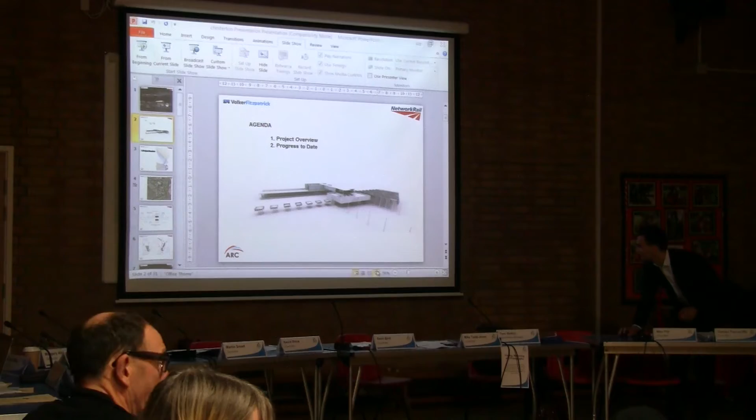What we're going to do today is the three of us talk. Joe is looking after the project from Network Rail's point of view on the site, so he's going to give you the overview as to where we are on the scheme. And I know there's probably a live debate at the moment around the planning application that's recently gone in for moving the car park.

Then I'm going to take you through - both of us going to take you through - some of the work that's been going on over the last few weekends, because as you probably know, the railway between Cambridge and Ely has been closed over the last couple of weekends to allow Network Rail to make this work all the way along the line, and that's allowed us to get cars and equipment onto the railway and do some of the work we need to do in advance of the scheme.

And then Rob is here to talk about where we are with the station opening date and other things like that. And Bodie, who I've not forgotten about, is here again today, because a couple of meetings ago he outlined the proposals for replacing the existing level crossing equipment at Fen Road level crossing, and he's going to give us all an update on where we are with that.

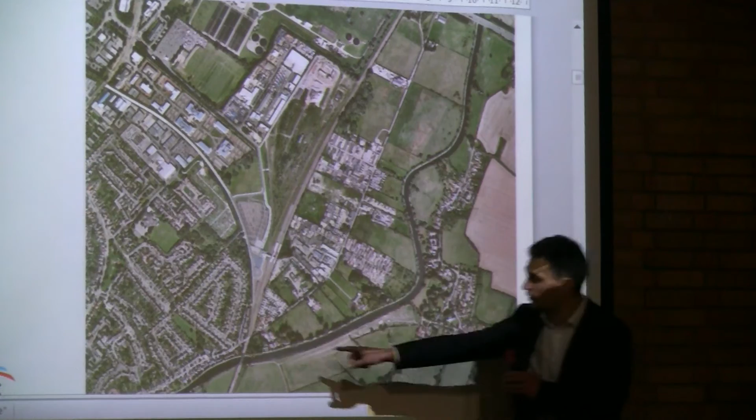The station itself essentially tags onto the existing infrastructure, the up and down main, with an island platform and a single platform. The single platform serves the up, so if you were travelling to London, you would access it on the single platform. Then there's an island platform, essentially a bay platform, which enables trains to terminate at the station, and the down to enable trains to travel to Ely and pick up at Ely.

We have tried very hard to reduce the amount of technical speak in this presentation, but I have to apologise - my colleague has informed you that in this particular instance, up is down and down is up. So if you're going up, you're going to London in the south, and if you're going down, you're going up to Ely. I hope that's very clear to you. Apologies for any technical talk, which Network Rail will notoriously be poor for. Chris can correct me as I go along, and I'll apologise in advance because it's ingrained in me, unfortunately.

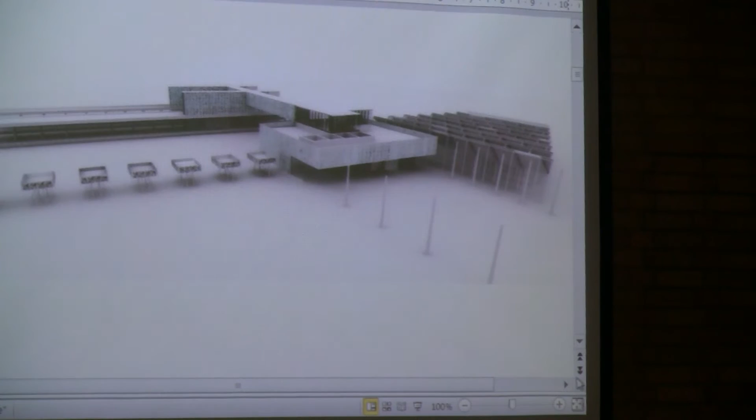Okay, sorry, we're not doing very well tonight, are we? There we go, two more, right?

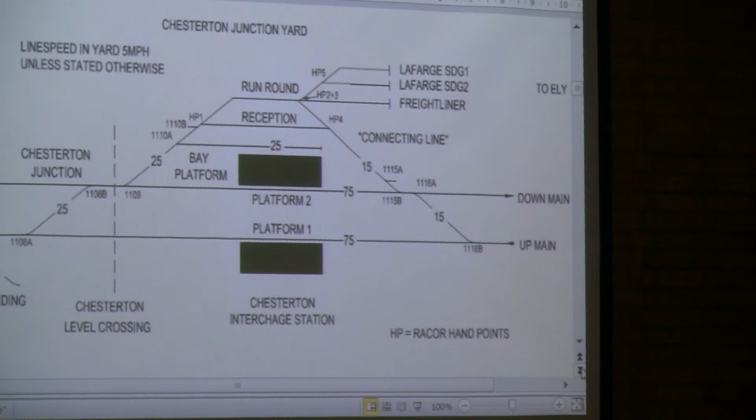One more. Okay, so here's a schematic. It's obviously not what it's going to look like at the ground, but it gives you an appreciation of the track layout as shown on site. As mentioned earlier, we've got the up and down main, which is the main line currently in existence, and shown just above that is the Chesterton Junction Yard.

Now this is the proposed layout, or the layout we've recently installed. This new layout was a scheme derived by Network Rail, because the current operation within the Chesterton Junction Yard meant that when trains were entering to manoeuvre into the correct siding to discharge materials that came in via train, they had to foul the main line at this point here.

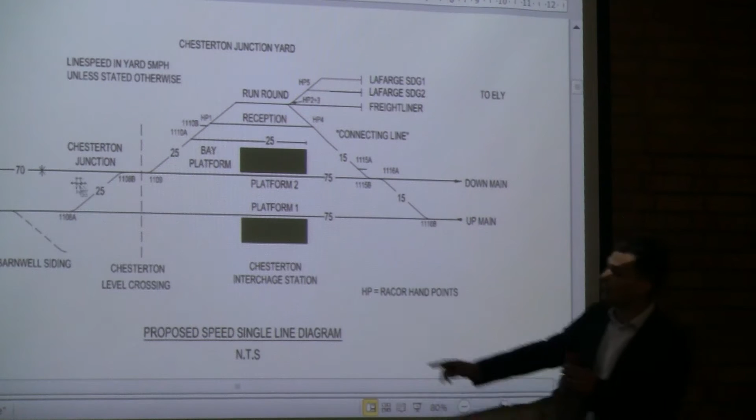Essentially, when trains were historically manoeuvring within the Chesterton Junction Yard, they'd foul that point, which would lower the level crossing, and there'd be a period of downtime whereby vehicles could have crossed the level crossing whilst that train undertook the manoeuvre to get to the location.

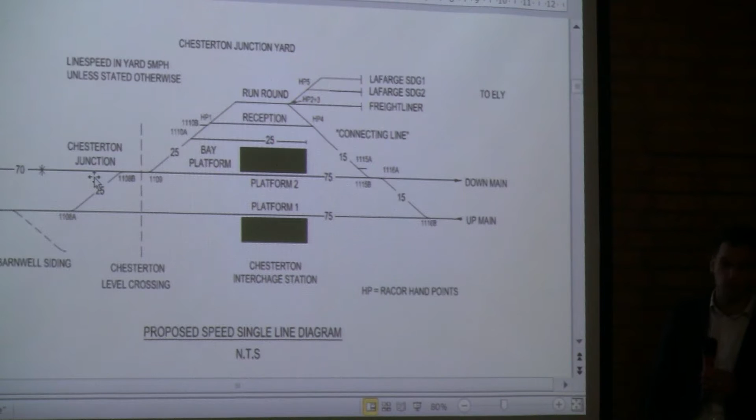As a consequence, Network Rail saw that as a constraint on the network and a hindrance to local residents. We've implemented this scheme that enables trains to come straight into the Chesterton Junction Yard and manoeuvre within the junction yard without fouling the main line. Essentially, that means there'll be less downtime on the barrier crossing when trains are manoeuvring within the yard.

These works have actually successfully been installed and have been in operation since the beginning of December. I'll show you some progress pictures of those works that have been carried out in conjunction with the station project as we move through the slides.

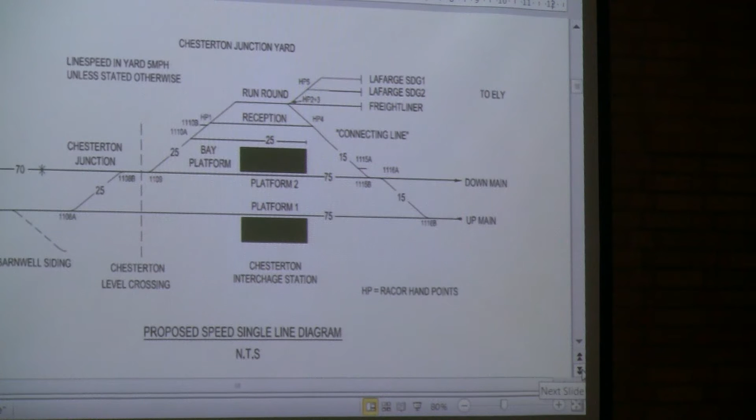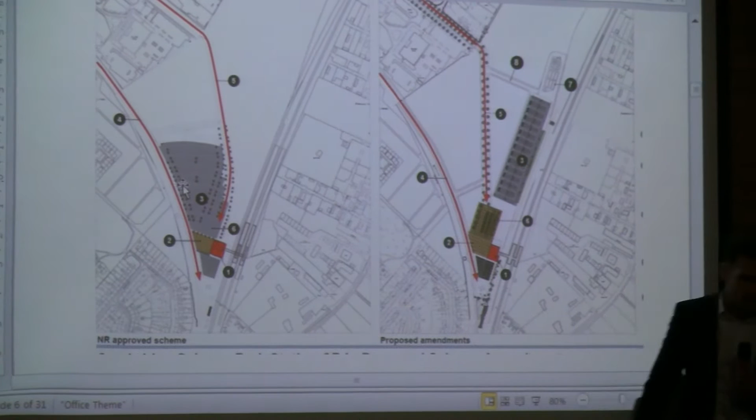Okay, so I previously showed you what we refer to as the NR application. It was the first application submitted by Cambridgeshire County Council, and Network Rail subsequently submitted a revised application so that we could implement the works.

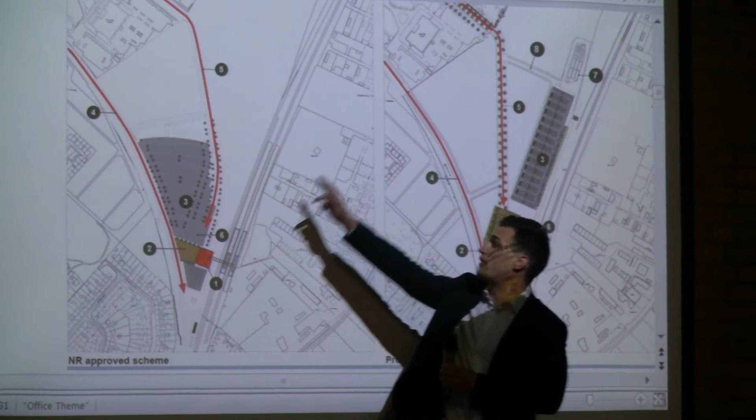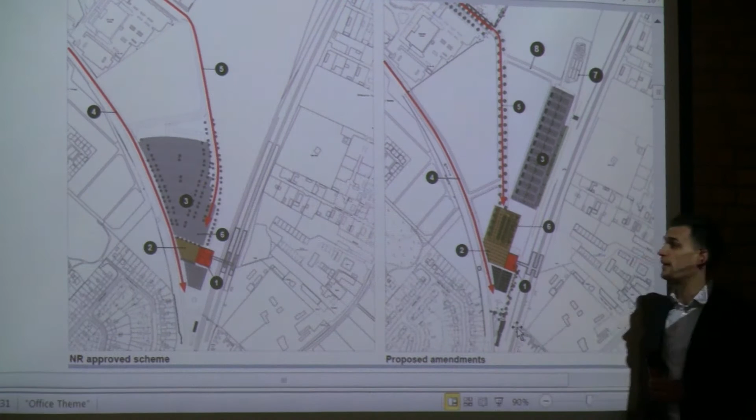So when Cambridgeshire were developing the design, they had to ensure all the station building was to the left of that red line. Now that's been diverted, it's essentially opened up the entire site. As a consequence, Network Rail had a look at that and put together a more efficient design that enables future-proofing, and takes into account the council's future master planning of the wider area.

Obviously, being a rectangular car park, it lends itself to being decked in the future should the number of car parking spaces exceed the supply currently provided. So if the 450 is insufficient, there's now a more reasonable means of extending that car park and providing further car parking spaces.

There was also an aspiration to provide a wider, more direct boulevard to the station. So essentially, when you come off of Cowley Road, there was a clean line of sight straight to the station building, which enabled a wider master plan around the wider area within the Chesterton Junction Yard itself.

The station building, platforms, cycle canopies and the guided busway leading in haven't changed. It's purely the boulevard leading into the station and the car park itself that's changed. So the visuals you would have seen of the station remain one and the same.

And that's the application that's currently under review with the council. This application was submitted to the council just before Christmas for initial review, and hopefully it will go to the Joint Development Control Committee in March. That's our target date.

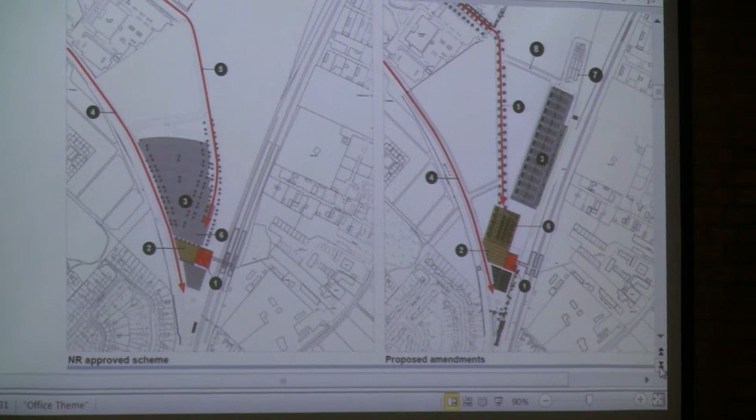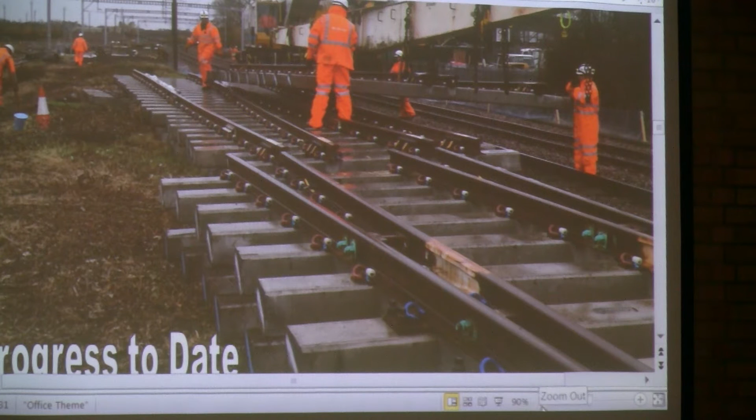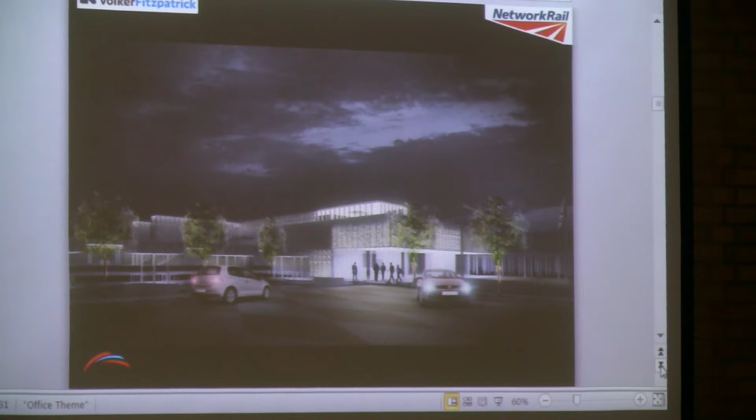So we've got some progress pictures. Those of you local to the site will be aware we've been in operation now for quite some time. A lot of work relates to the freight sidings job that's now operational, and other works relate to the actual station building itself and getting it prepared.

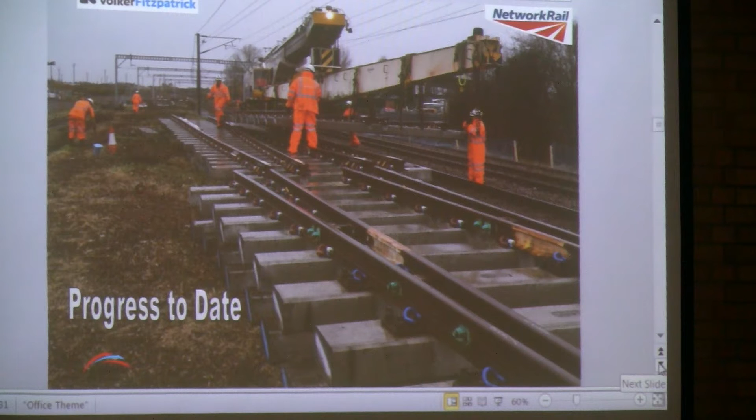This is a picture of some of the track panels we have to bring to site, which are modular. It saves a lot of the on-site construction of having to build it on-site, and the noise and hindrance that comes with that in-situ form of construction.

Again, this is one of the slides where there's animations. We might be able to put them to one side.

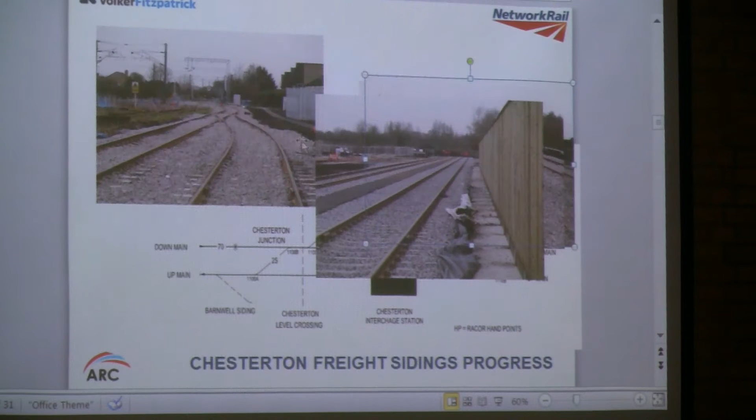So these are the new sidings that have been installed, and there's just a few pictures here, and it's difficult to see now in relation to the schematic below. Essentially, this turnout into the sidings here, Fen Road level crossing is... I'm doing really bad there. In the distance here, you can just about see Fen Road level crossing.

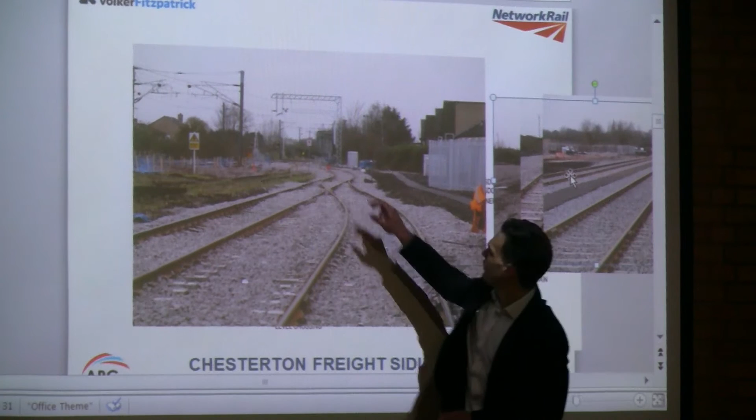So the project has had to renew all these turnouts leading in, realign the permanent way, which is the track, and undertake all the signalling works associated with that. It's quite an intense piece of work that has to be undertaken when trains have stopped, disruptive possession, so a lot of time overnight.

Just so you can get a sense of scale, how close we are to that level crossing and the works we're actually doing there. This was a key piece of infrastructure that enabled the freight sidings to operate without fouling the main line.

Sorry, I've only just realised - this is the main line, the section on this side where you've got the overhead cables and whatever that power the trains. So there's a new set of points there, and then this new set that's all been put in to make everything work.

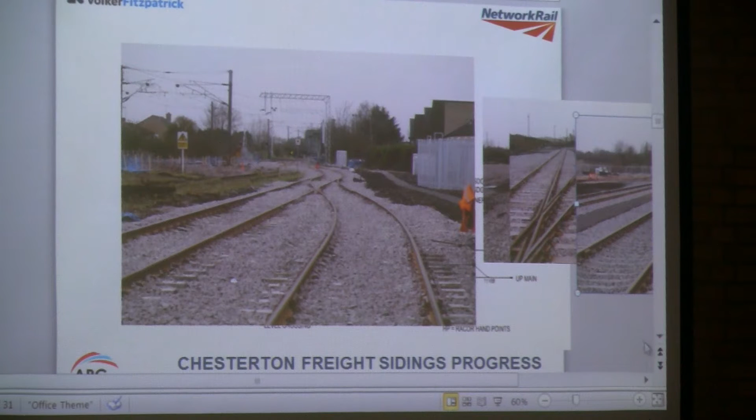There's a final bit of work to be done then, just to tidy it up, so the ballast needs to be swept so you can see the sleepers and the lights. It might not be openly recognisable at the moment, but there's still a bit of work to do on that.

Okay, so this just shows the terminal sidings as well. So these are the two new sidings.

So just in that yard, there's a Lafarge plant, and they bring in lots of aggregate on these discharging trains. These big 40-wagon trains filled up with aggregate discharge into the yard. This is the terminus we've constructed for them, and they'll discharge their aggregates off to the left, which is to the north of the site, away from the station building.

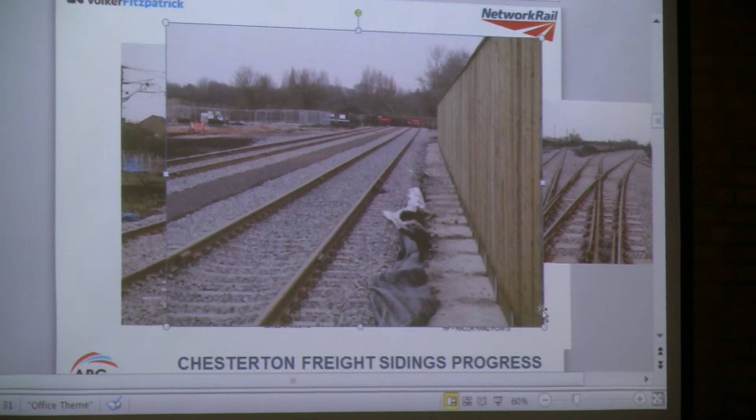There's very few of these trains in the country that operate on the actual rail, and with the extent of rail works going on at the moment, Crossrail and the like, these are very difficult to get hold of, so we have to book them over a year in advance.

For the ordinary people in the room, a disruptive possession is when the normal scheduled passenger and freight train services are cancelled or suspended temporarily, so that we can come on with all this stuff and actually get on with the plant. Because you don't want live trains running while we're trying to do this sort of work, because people and trains don't mix.

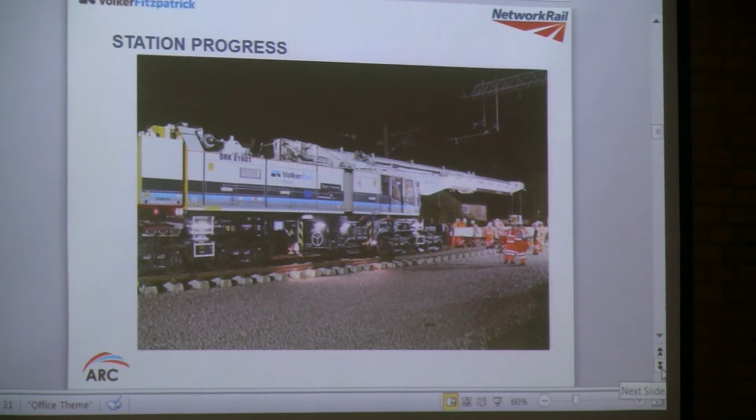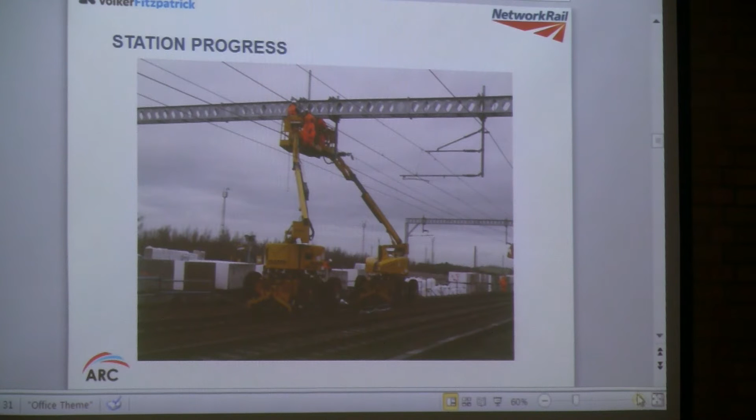Those of you local to the area would have seen these new big grey structures appear out of thin air. These are new structures supporting the overhead line equipment, which essentially powers the trains when they operate.

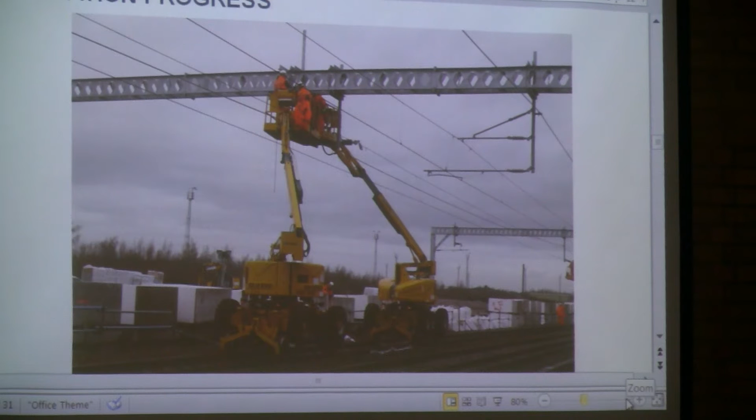These gantries are put in wider to accommodate the platforms to be constructed underneath. A lot of the infrastructure out there had life expired, so it needed to be put in advance of the station building being installed and the station becoming operational.

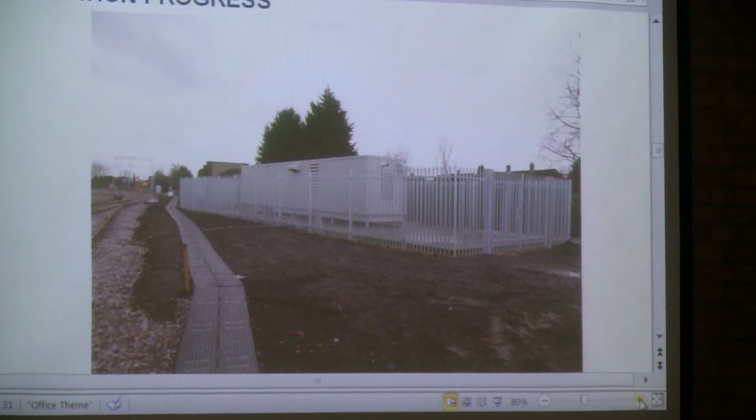As many of you are aware, the infrastructure that trains run on is many decades old, and a lot of the cables have degraded. When you start meddling with this type of equipment, sometimes it unravels itself - you touch one thing and something else falls down elsewhere on the network. It was a very sensitive, critical piece of work that needed to be undertaken as part of the station project, but also because of the life-expired equipment.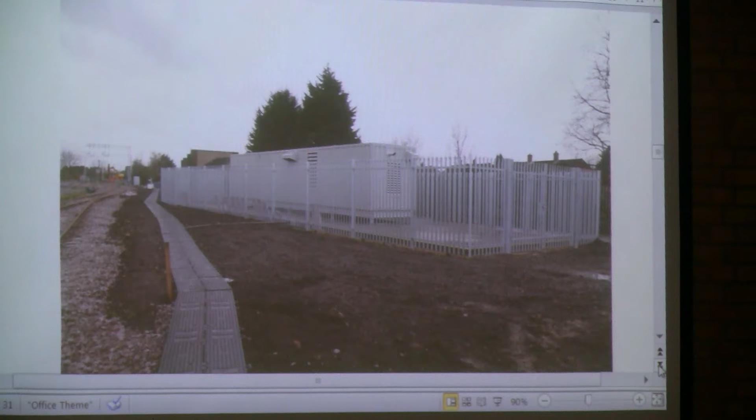That's been successfully installed and is now operational. It also gives a lot more security on the network and fail-safe systems, so now when there are power outages, backup generators automatically kick in and keep the network running. It doesn't look very pretty or impressive, but it's a vital bit of equipment that helps ensure trains keep running on time.

Here's a picture of a pile. Those big grey gantries I pointed out earlier - this is what they sit on. These piles can be in the region of 12 to 16 metres in the ground, and they're vibrated, hammered or pushed into the ground typically. This is just an example of one that's installed.

As you're probably aware, being so close to the River Cam and the long embankment we've got, access is difficult. So we can only install these via on-track plant equipment, which means stopping trains, and means we need to plan 14 months in advance. So something as simple as putting a foundation in the ground takes up to 14 months to actually plan and implement. It was a real success to see those go into the ground.

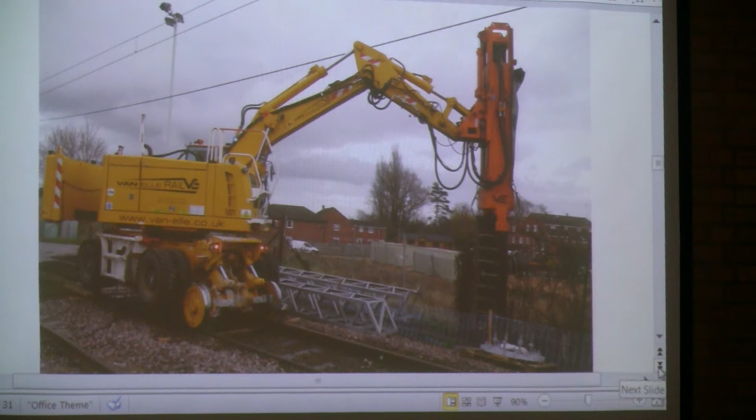They won't blow away. It's a new form of construction, like a condensed, dense polystyrene which is lighter and quicker and easier to install. Typically, when you construct a platform, you generally need a vast amount of disruptive possession, stopping trains for a long time to install. A company came up with quite a simple but very effective solution to try and minimise the disruption to passengers - this polystyrene blocks platform.

They've been approved as a product for the required design life, and they're composite because there's a precast concrete slab that sits on top - essentially what you'll be walking on.

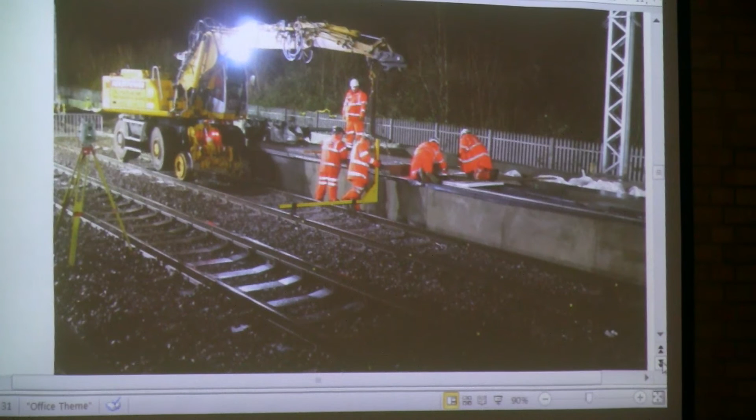Here's another picture of these, which we call copers - precast concrete slabs that sit on top of the polystyrene at essentially the finished level, though there's a bit of work to do on that yet. As mentioned, these possessions we booked the best part of 14 months ago were to pull in these platforms, and fortunately we've been able to install it.

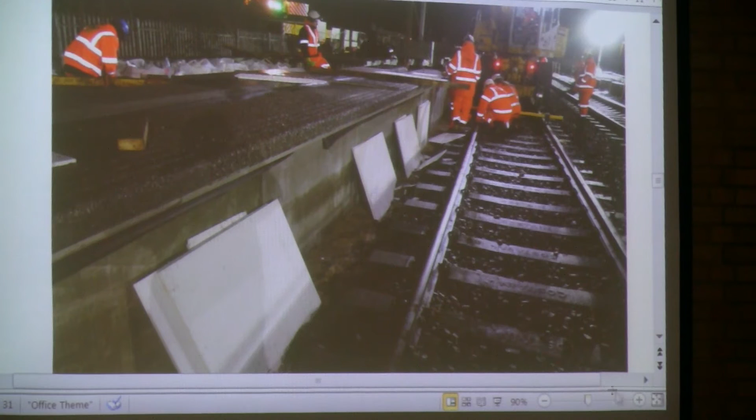Gosh, it's my turn. Thank you.

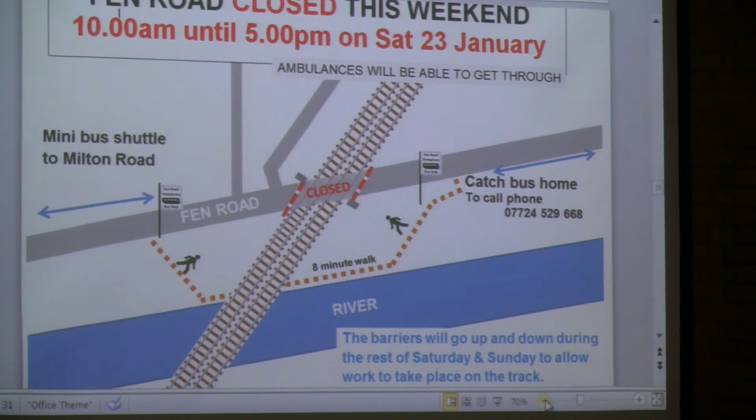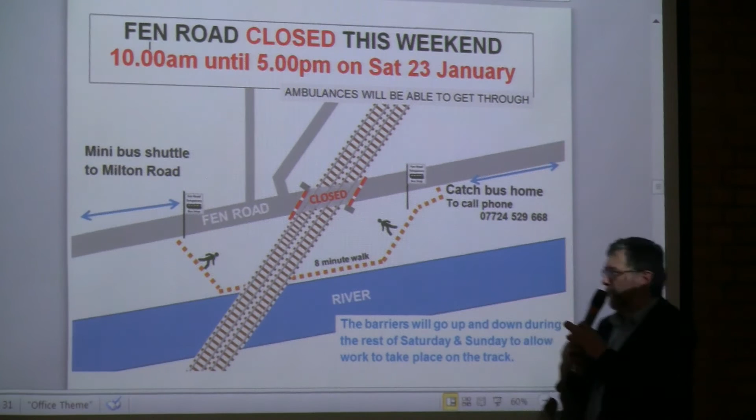Over the last couple of months, there have been five weekends when the railway has been closed between Ely and Cambridge, and that's allowed lots of people to get on and do their work on the railway. For us, we needed to close the level crossing itself at Fen Road, and we've tried to tell everybody about it. We've continued to look at the programme to reduce the amount of time it's closed, and this weekend will be the last weekend we are able to close it this year.

So we're going to be closing it, unfortunately, between 10 a.m. and 5 o'clock at night on Saturday the 23rd. There are some other closures we'll talk about later, but that's for this weekend, and we've been around telling everybody, particularly on the east side of the railway, that's going to be the state of play.

We've been talking to Cam Conservators about using their towpath as a route, and we'll have a couple of minibuses so people can get from one end of Fen Road to the other rather than walking, because it's quite a long way. There's also a minibus shuttle service taking them up to the co-op and the main road while we do the works. We've used it on previous weekends and it's worked quite well - it isn't broken, so we don't need to fix it. We'll have another crack at doing that this weekend.

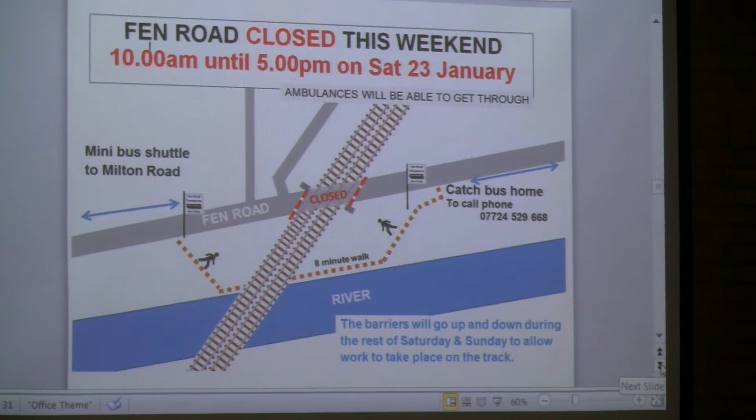When we first started the programme, we were looking at a total of 118 hours we were going to have to close the level crossing for, over three particular periods. The guys in the office realised it was going to be horrendously inconvenient, so they reshuffled their works, did some of it without needing to close the level crossing - I don't know how they managed that - and condensed other works into the time we had available.

We've only just done the maths tonight, and found out we've actually reduced the amount of time the level crossing hasn't been available to private vehicles by 50%. Not bragging about that - we still had to close it - but folks bore with us, and we've been trying to find ways of reducing that time.

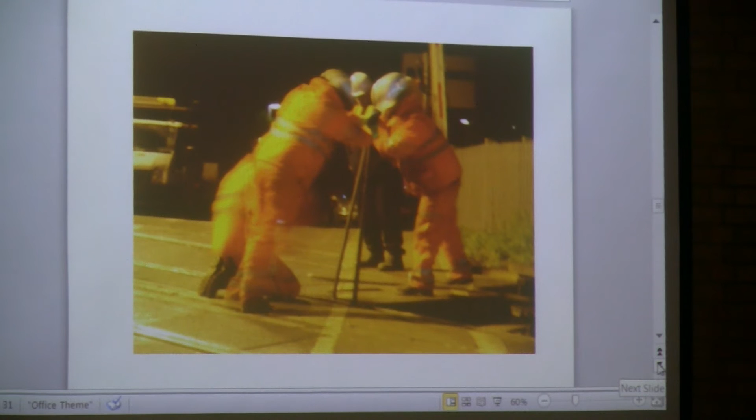While we've been closing the level crossing, it's been my job to stand out there and keep an eye on the contractors, but also deal with members of the public and make sure the minibuses work and all of that sort of thing. It's dark, it's cold, so some of the photos are a bit shaky, but we decided it would be nice to show you some of the things we do.

So the first picture and this one show the guys actually taking the level crossing panels out so we can get to the railway. That's why we have to close the road - because there's no road for anybody to drive on. But we do have an emergency bit of road we can put in if there was an ambulance coming or whatever, so that was covered.

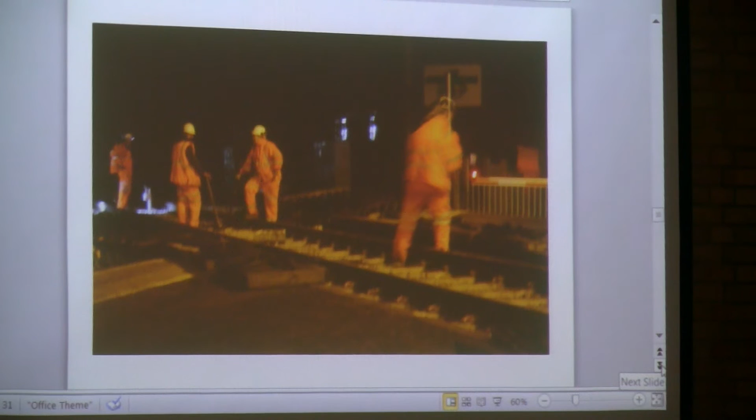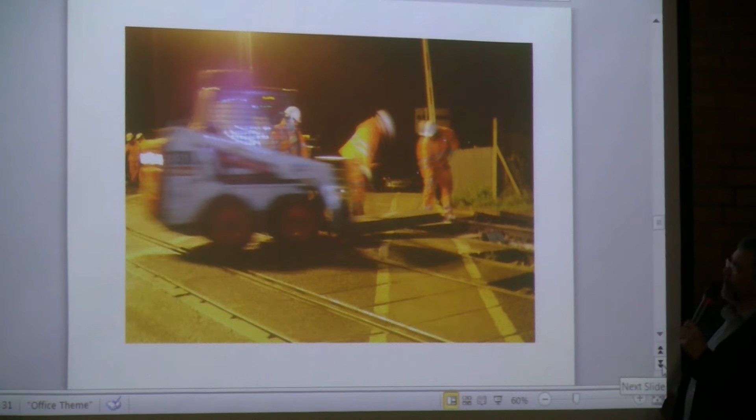This is called a bobcat because it says bobcat on the side of it. It was moving so quickly, and that's a bit of gear which is quite nifty for when the guys lift these panels out - they can take them to the side, because they've got to put them back in the right way, else it doesn't look very neat and tidy afterwards.

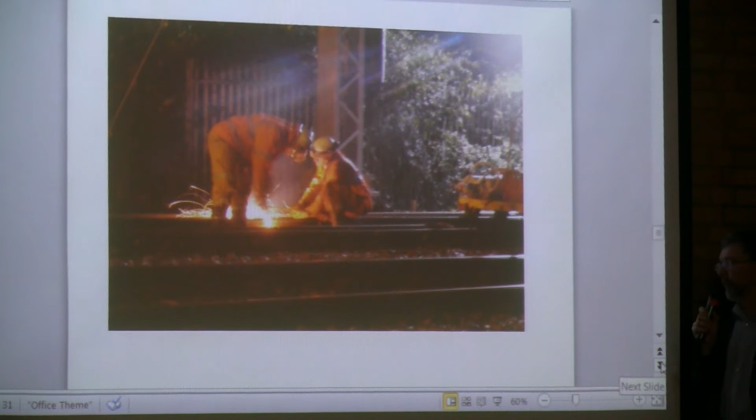Having done that on the first weekend, the next thing was to cut up the rail and the sleepers into lengths we could pick up. So here are a couple of guys - the level crossing is still being taken out, and they're cutting the rail into 10-metre sections or whatever so we can get it out as quickly as possible.

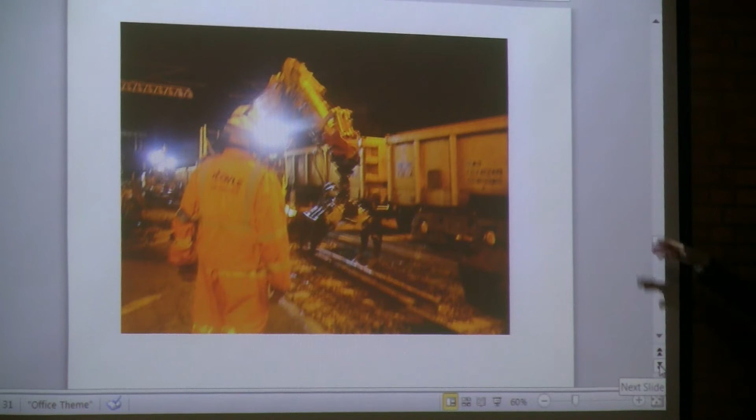Then we had a train that came in - it was quite a long train. It had space to put the bits of rail and the sleepers and also the ballast we needed to remove. Another part of the train had new materials in it, so that had to shuffle up and down the other railway line, the one on the east side, while we played with the railway on the west side.

So then you reach a point where you've got a train and the railway, and where it was by the level crossing, it's all gone and taken down, and then during the day other teams came in and put in new ballast and new track sections, pictures of which Joe had got. He was working during the day and I was working during the night. This is a little bit later on a night shift.

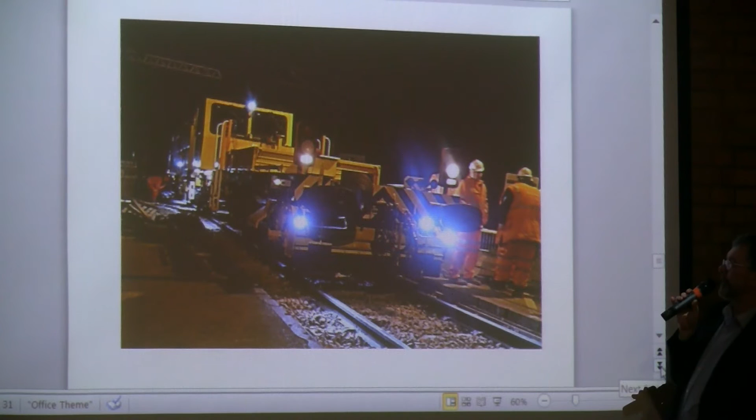This is a horrendous bit of a single train unit that goes up and down the network, designed to pick up the track, then it puts some whisks into the ballast, turns it round, and consolidates it. It's very noisy, but it's a very efficient way of consolidating the ballast, which you have to do, because if you put ballast down and track, it tends to move a little bit. Doing this a couple of times helps hold the track in place and gives everybody a safe ride, but also an even ride, because it takes the bumps out of the track - bumps that go up and down, and bumps that go side to side.

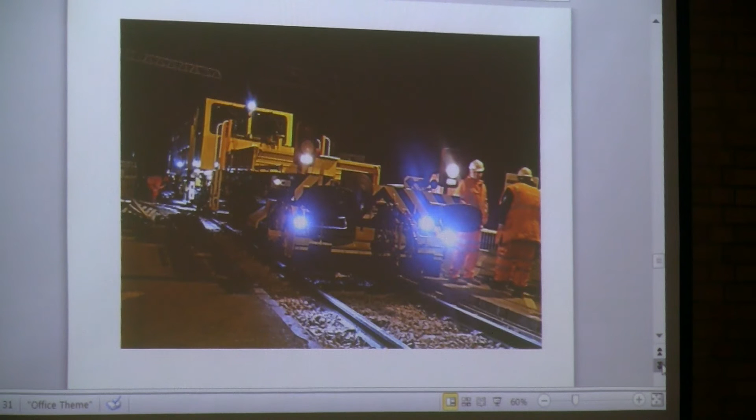This is the guy on the plant. He's got headphones on and a walkie-talkie system in the middle, and he's actually talking to the train driver, telling him to move the train a bit. These are the prongs that come down either side of the sleeper, because they don't want to damage it. It plays with the ballast, goes back up, and then squeaks to the next set of sleepers.

So if you do live in Moss Bank, or you've heard us on previous weekends, that's what we're trying to do. And we'll be doing that this weekend during the day.

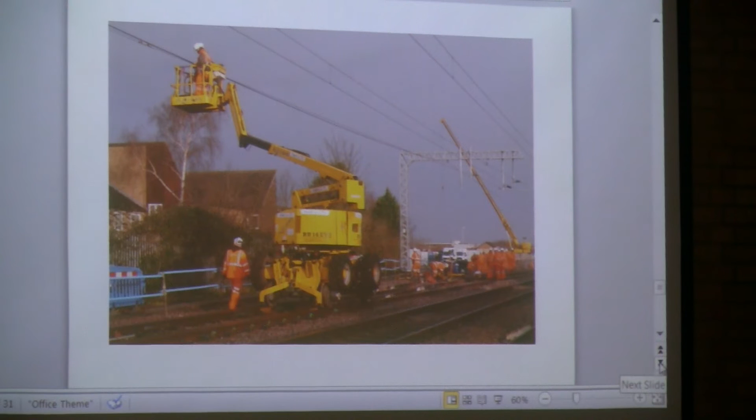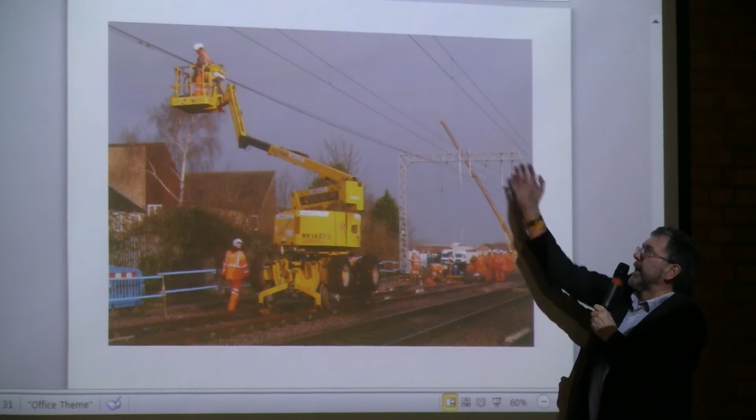You've seen the picture of the overheads playing. We've got this goal post gantry, which Joe was talking about, and then we have to hang all the little bits and pieces on here, which help with the alignment of all the overhead cables. That's my attempt at a scenic shot, so we'll forget that one.

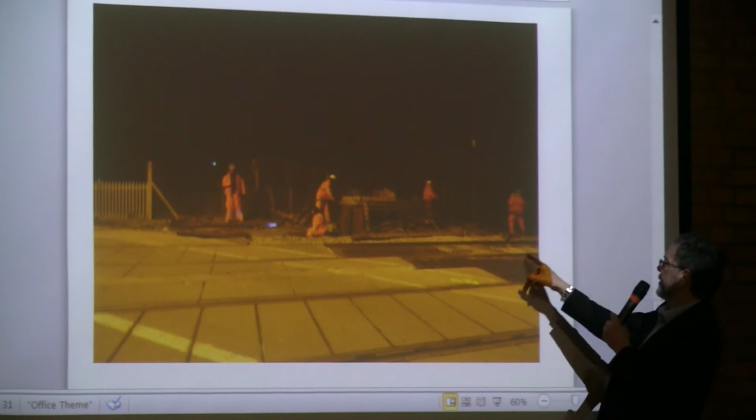And these are the guys - I was talking to some ladies earlier over here about the cattle grids on the sides, and that's what these bits of wood are, which these gentlemen are manhandling here, to try and deter people from going onto the railway away from the level crossing.